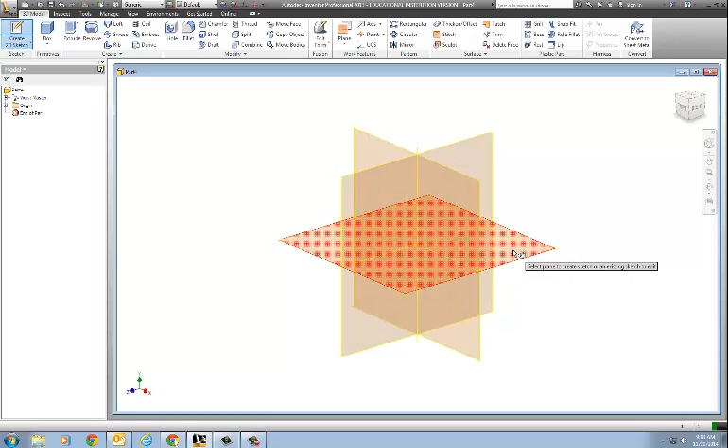Okay, we're going to create the peg for the beverage server. Go ahead and create a new standard IPT and then click Create 2D Sketch. We're going to use the horizontal XZ plane, so go ahead and click on that.

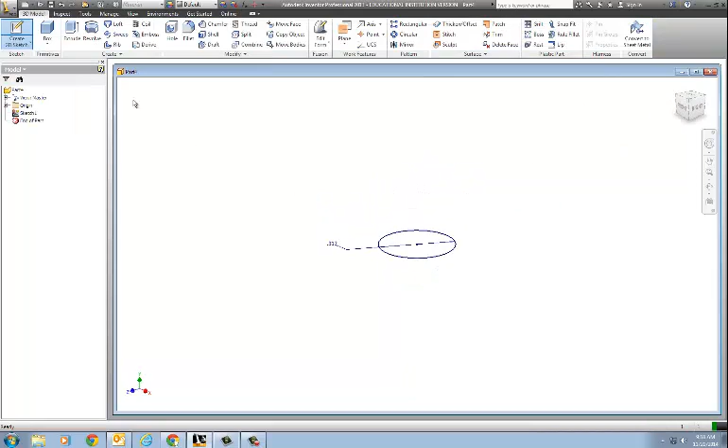Let's take the circle tool and, using the center point on our screen, create a circle, and that dimension needs to be 5/16 of an inch. Okay, finish that sketch and let's extrude this cylinder to 3/8 of an inch.

Now let's create a sketch on top of that cylinder. Using the same center point, let's draw another circle, and the dimension of that circle needs to be 3/8 of an inch.

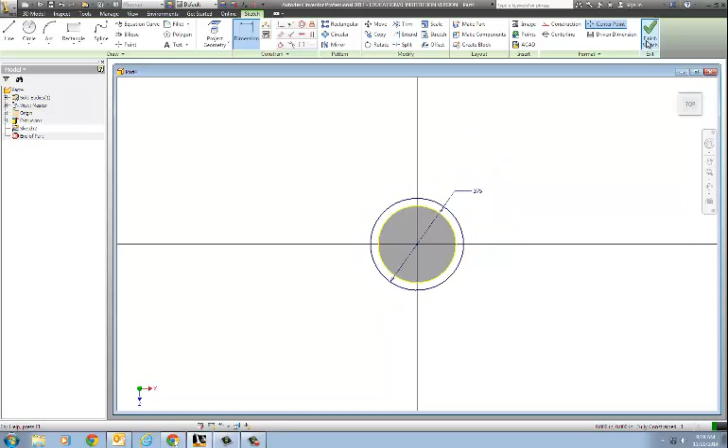Okay, let's finish that sketch, and then we're going to use a work plane on top of the cylinder. Click your plane right here. When you hold your mouse on top of the cylinder, you can kind of see the plane. Just click with your mouse and drag away from the cylinder, and we want the plane to be

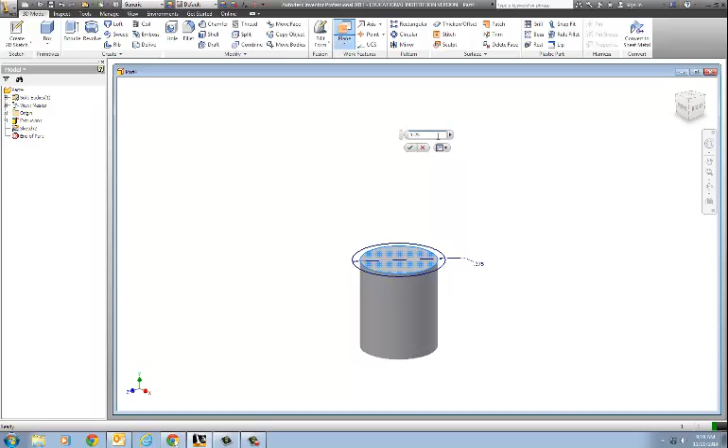1.25 inches above our cylinder. So I'm going to click home so you can see the plane. Now let's click Create 2D Sketch on top of this work plane.

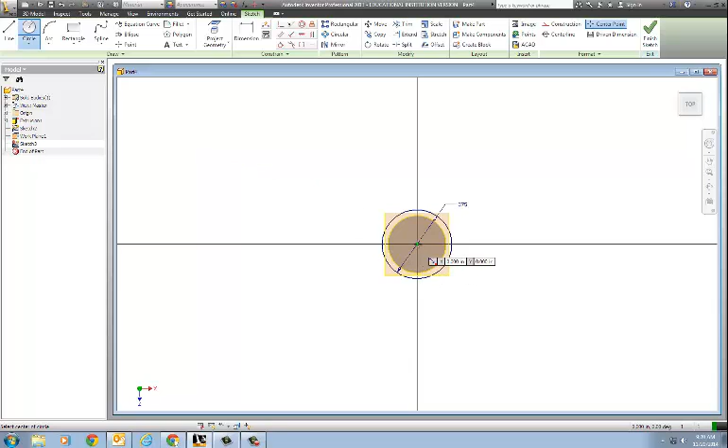Okay, now take your circle tool and we're going to again use the same center point, draw another circle, and let's dimension this to be 5/8 of an inch.

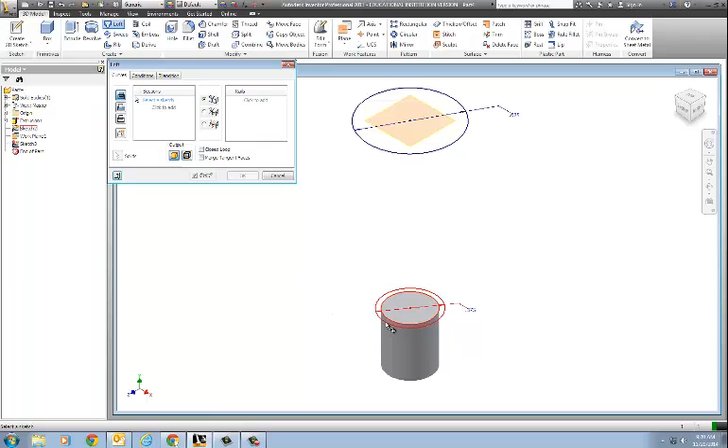Okay, so when we finish that sketch, we're now going to use the loft tool to connect this bottom circle up to this top circle. So the first one we're going to click on is the bottom outside edge and then the face of the cylinder.

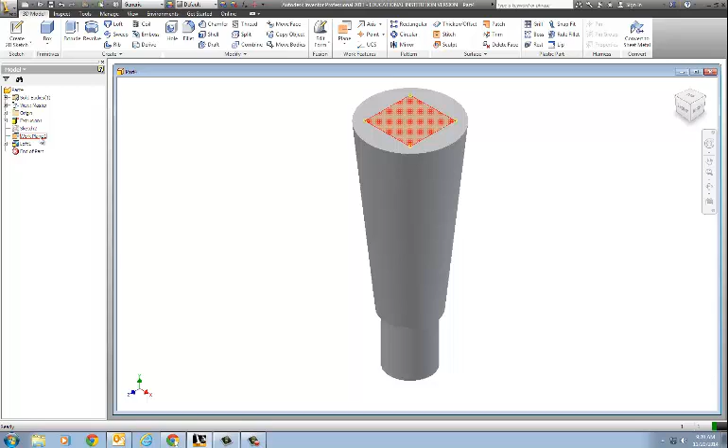Then just click to add and choose the top circle, and it should fill in the main part of the peg. Click OK, and let's go over to our browser and hide this work plane. Just right click where it says work plane 1 and choose visibility.

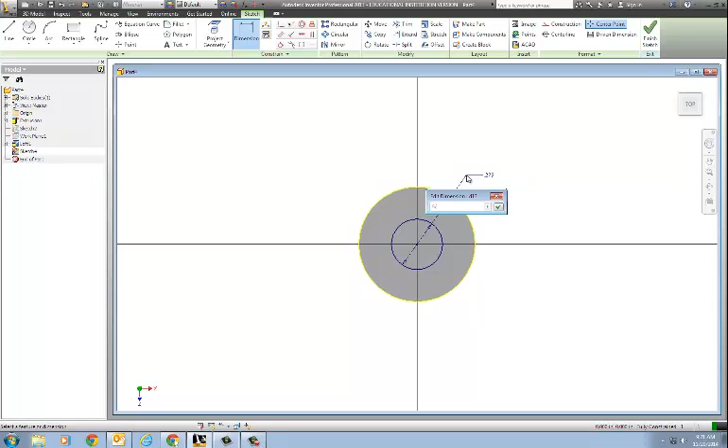Okay, now let's create a 2D sketch on top of our cylinder. Take the circle tool on the center point again, and this top circle needs to be 5/16 of an inch in diameter. Okay, finish that sketch.

We're going to extrude that last circle to be 1/4 of an inch, and that's the peg.